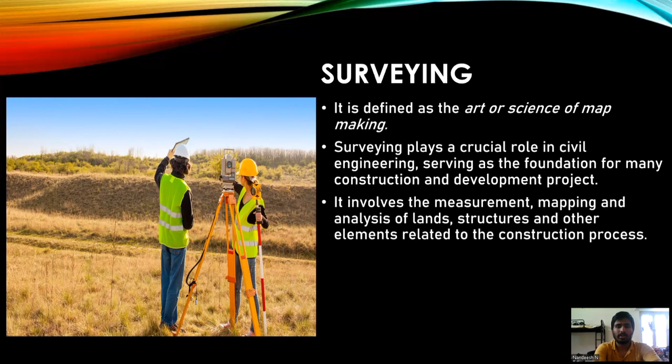The main objectives of surveying are gathering data, which refers to collecting data using instruments like total stations, GPS, and levels, and establishing control points, which are reference points using which all measurements on a project site are taken.

Other objectives include determining property boundaries, setting out reference points, creating topographic maps, and monitoring deformations, which refers to monitoring structures to detect any deformations and movements. Common instruments used for surveying are chain, tape, compass, auto level, theodolite, total station, GPS, and drones.

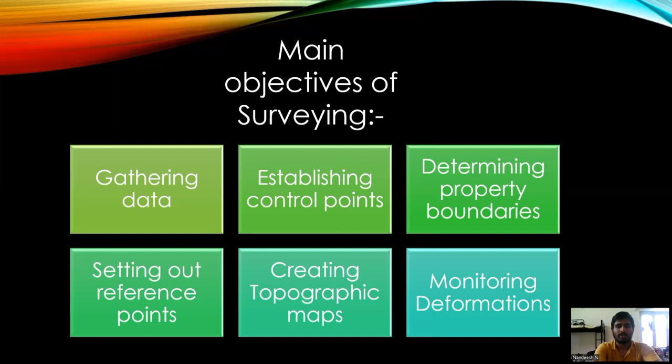The next field of civil engineering is geotechnical engineering. It mainly deals with the study of soil, its types, and their properties. In building structures, the foundation is laid from a certain depth below the ground surface, and the soil should be thoroughly checked for its suitability for construction purposes.

The study dealing with the properties and behavior of soil under loads and changes in environmental conditions is called geotechnical engineering. Proper geotechnical engineering is essential for a safe and secure structure. It is also used to determine which type of foundation is required for a certain structure, and is beneficial in the design of dams, roads, transportation facilities, and underground structures.

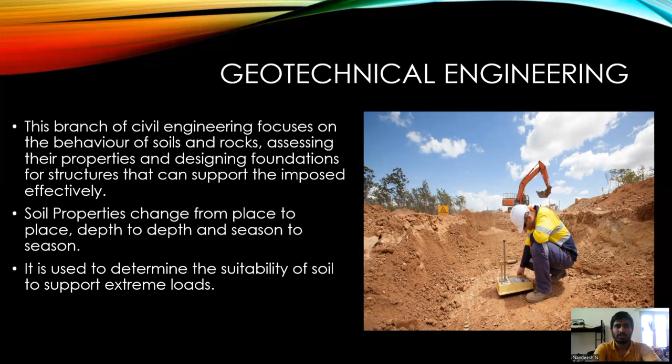These listed uses are the benefits of geotechnical engineering.

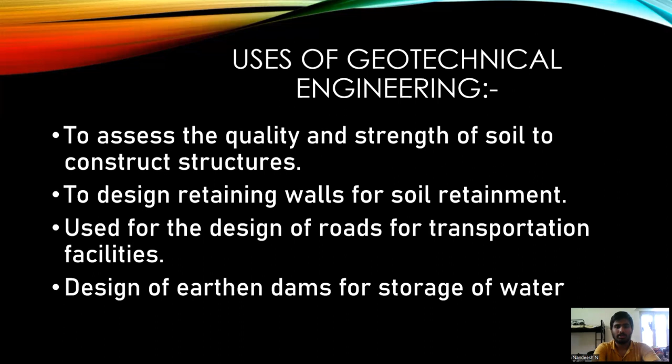Our next branch of civil engineering is structural engineering. It mainly deals with analysis and design of various steel and concrete structures like towers, buildings, dams, and bridges. Analysis refers to determining the internal forces or stresses developed in structural components due to applied load. Design refers to finding suitable dimensions like length, breadth, depth, and height for structural components using various methods.

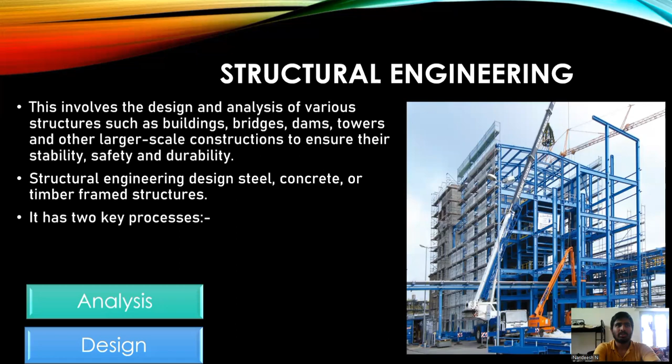The uses of structural engineering include analysis and design of power generation stations and steel industrial structures, analysis and design of stadiums, auditoriums, and multi-storied buildings, design of nuclear power plants, and repair and maintenance of structures.

Our next branch of civil engineering is construction planning and project management. Development of new technology and machinery like cranes to lift weight, painting machines, plastering, concrete and tar laying machines have been made. This makes construction easier and faster.

This branch of civil engineering involves tasks like excavation of soil, construction of foundation, concreting, and finishing using different techniques. On-site handling of construction and structures like buildings, roads, floating structures, and underground tunnels using modern equipment will be looked after by construction planning.

Project management refers to scheduling, planning, and execution of construction activities related to a project. It deals with labor management, materials required, time taken to finish a certain structural component, and most importantly, expense management. Emphasis will be on new construction practices like precast construction and pre-stressed construction, safety of men and material, and utilization of marginal materials.

Our next branch of civil engineering is hydraulics and water resource engineering. Hydraulics involves the study of mechanics of water and its flow characteristics like pipe flows, dams, irrigation, and open channel flows.

The next branch is environmental engineering. This is an important branch of civil engineering which covers both water supply and sanitary engineering. The importance of a clean environment was felt with the rapid growth of population and the rise of urbanization and industrialization.

Water supply covers tapping water from different sources, testing its quality, purification processes, and distribution of water to consumers. Environmental engineers encompass the treatment of wastes originating from different sources and deal with removal of harmful substances in these wastes by different processes.

The central government, state government, and local bodies have implemented laws for the protection of the environment and all living beings, including humans. It also branches out to complete various tasks like solid waste management, e-waste management, and construction management.

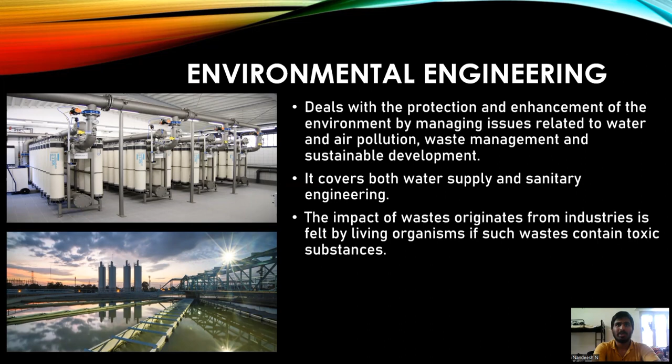Our next branch is remote sensing and GIS. Remote sensing is a relatively new field. It originated and is used in civil engineering due to advancement in space technology, availability of GPS, and an improved geographic information system. GIS is a high-tech equivalent of a map.

It represents a means to locate ourselves in relation to the world around us. It deals with measurement, mapping, monitoring, and modeling of geometric and geographic information around us. It also allows us to send information accurately and quickly to effectively manage the available resources for optimal use.

The key applications of remote sensing in civil engineering are topographic mapping, land use and land cover analysis, infrastructure planning, environmental monitoring, slope stability and geohazard assessment, water resources management, construction site management, traffic management, and remote sensing in structural health monitoring.

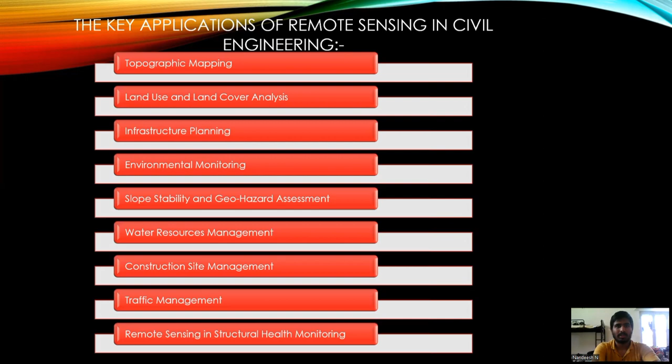The last application of civil engineering is earthquake engineering. Before learning about earthquake engineering, let's see what an earthquake is.

An earthquake is a sudden, rapid, and violent shaking of the ground, typically causing great destruction as a result of movements within the Earth's crust or volcanic action. The scientific study of earthquakes is known as seismology.

Earthquakes and their impact are measured using a seismometer, and seismic waves are recorded on seismographs. The time, location, and magnitude of the earthquake can be determined using these seismographs.

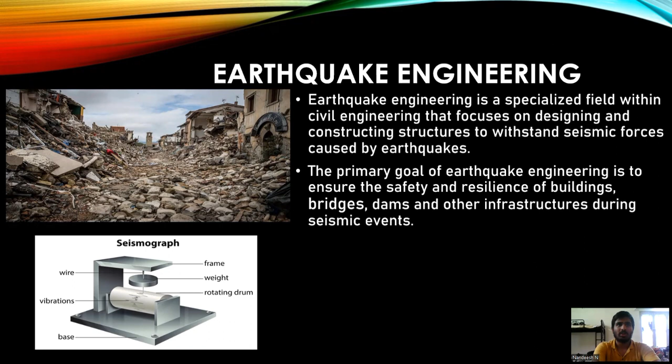The key applications of earthquake engineering in civil fields are seismic design of structures, retrofitting, foundation design, bridge engineering, risk assessment and mitigation, non-structural elements, seismic codes and regulations, and earthquake research and innovation.

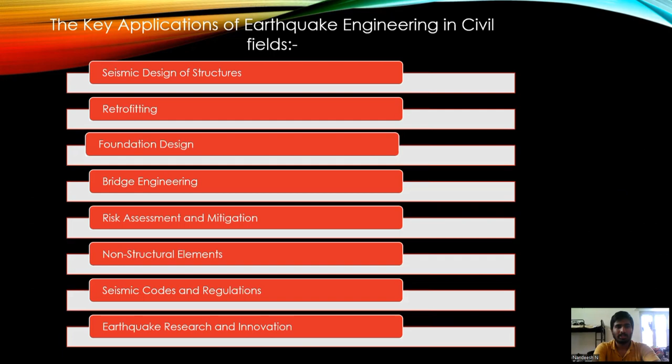Conclusion: civil engineers play a crucial role in shaping the environment and improving the quality of life of people all over the globe. They work on projects ranging from small-scale residential buildings to large infrastructures, aiming to meet the ever-growing demands of modern society while considering environmental sustainability and public safety.

They collaborate with architects, urban planners, environmental scientists, and other professionals to create innovative solutions for complex engineering challenges.